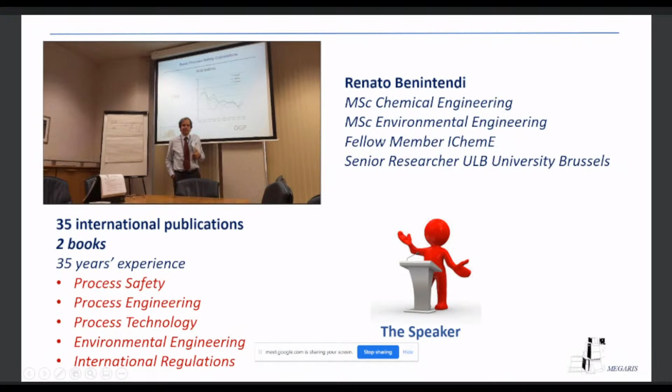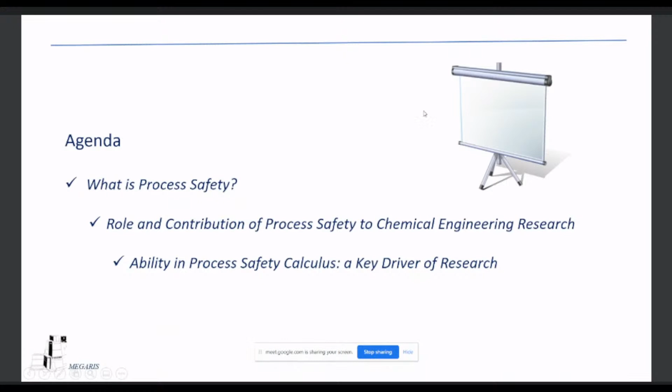I've tried to summarize this into 3 main questions, essentially covering the subject we are going to face today. The first is, what is process safety? That's important to share with you, to have a common understanding of the wording, especially for those of you not yet involved in process safety jobs. So what is process safety? The second subject is the role and contribution of process safety to chemical engineering research. And we will finish our discussion by presenting something about the ability in process safety calculus as a key driver of research.

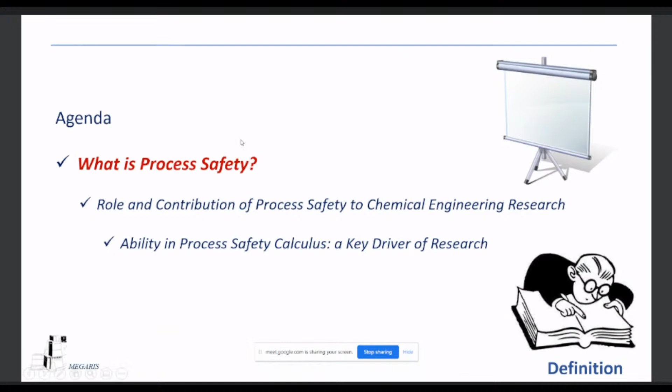This word is very easy, very popular and familiar for people that work in engineering companies. But if we go into the word, we can discover something that could be very interesting, and especially very effective in clarifying exactly what we mean, much more than just the general meaning, the implications that such a word entails.

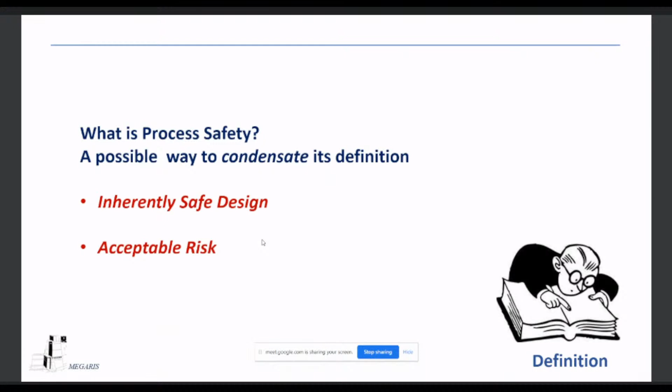I've tried to condense the definition of process safety into 2 main lines: inherently safe design and acceptable risk. I have the illusion that these probably cover 100% of the challenge and difficulty that we normally meet when trying to be effective in resolving the problems of process safety.

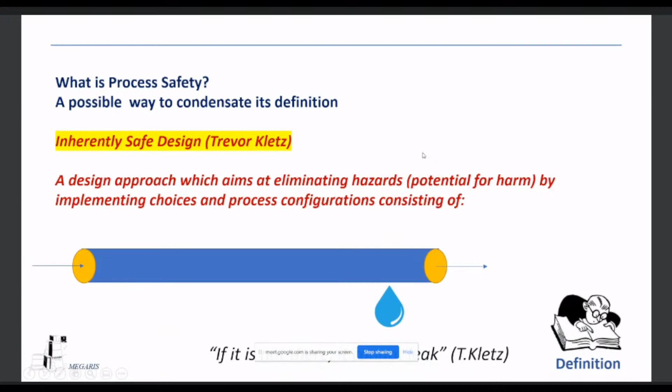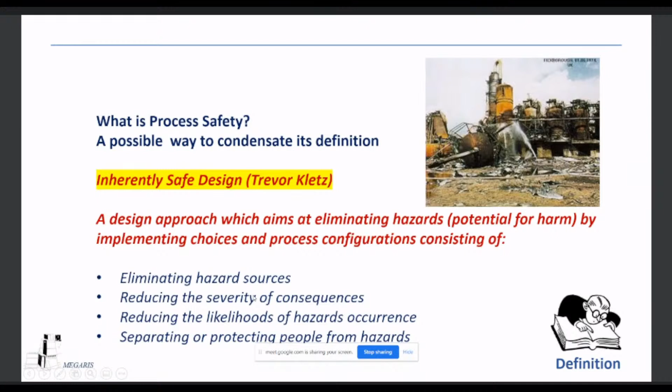Inherently safe design: we have to go back into the past and remind you of Trevor Kletz. Trevor Kletz was a chemical engineer working for ICI in the United Kingdom decades ago. After a couple of important incidents in the UK, first of all the Flixborough incident, he created essentially the concept of inherently safe design, which we can define as a design approach aimed at eliminating hazards. Remember, hazard is a potential for harm. This is achieved by implementing choices and process configurations consisting of eliminating hazard sources, reducing the severity of consequences, reducing the likelihood of hazard occurrence, and separating or protecting people from hazards. So this is essentially the target.

We have to go back to focus better on the introduction of this definition into process safety. 1974, it was a Saturday, and of course we know that the most catastrophic incident in process safety history occurred during the weekend - this is not just a secondary thought. We had essentially a series of reactors managed by the Nypro plant company. We are in the UK, in England. This process was related to the production of caprolactam through oxidation of cyclohexane into cyclohexanone. There was a problem.

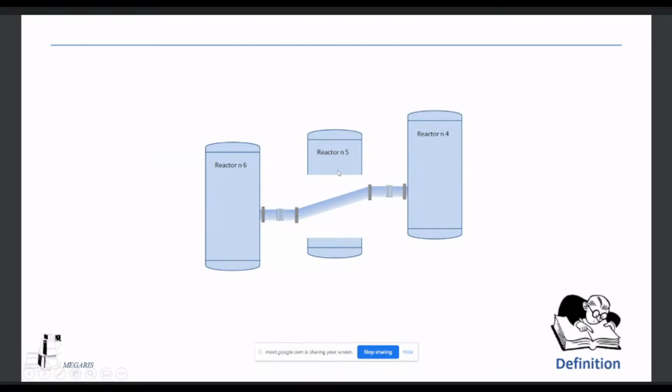A junior process safety engineer was on site on Saturday. There were no managers, no senior technicians on site. Just a junior engineer discovered that reactor number 5 was affected by stress corrosion, and decided to remove reactor number 5. We can see essentially some boilers - these are reactors, but in reality they are like boilers, and there was flow from the top to the bottom by gravity. He found out the reactor number 5 was affected by corrosion, but just the beginning of corrosion, and decided to remove it.

The best he could do was connect reactor number 6 to reactor number 4 with a dogleg, with a gap between the axis of the bellows of the flanges. It was an absolutely big mistake. We can probably figure out what happened: in reality, when the plant was started again - we're dealing with something like 200 degrees Celsius and significant pressure in terms of bar - so a very potentially critical process condition.

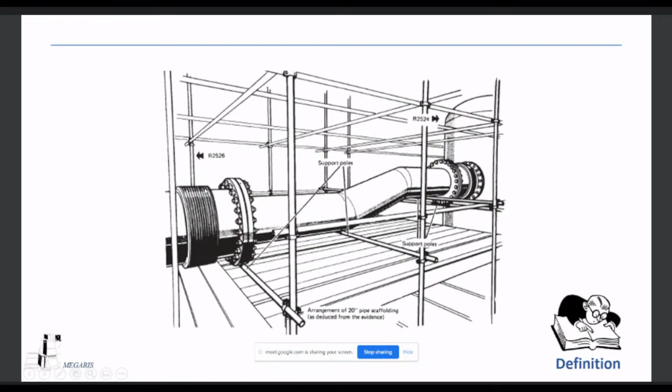When the plant was restarted, there was essentially a moment applied through the axis of the flanges that was initially balanced by an additional moment consisting of two shear forces. These shear forces ruptured the bellows, which were not designed to withstand such forces. And the problem was that we had essentially released - there was a leak of cyclohexane at very high temperature.

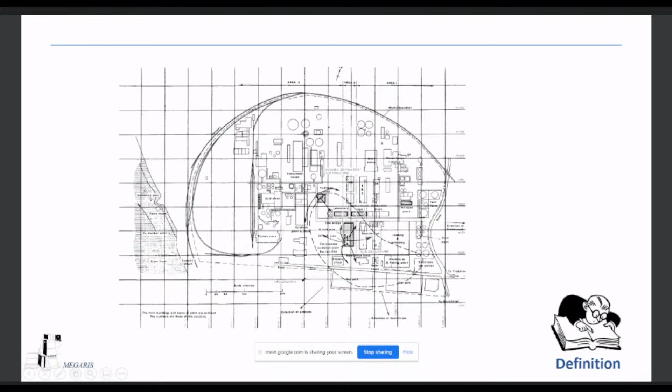There was a witness reporting that the cloud started from the location of the reactors, the 6 reactors, and arrived at the so-called hydrogen location of the nitro plant - that was the previous process configuration, where probably the cloud was ignited. There was a flash fire. Some witnesses reported that the laminar burning velocity governed the flashback of the flame back through the plant site, and this was essentially the result.

We were in 1974. Before that, probably the only incidents we can register in our records were related to inorganic chemistry.

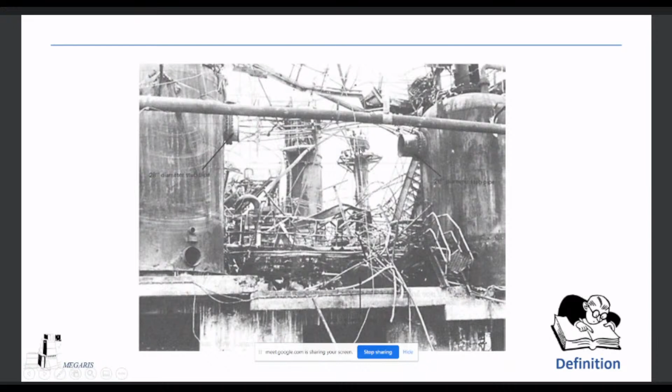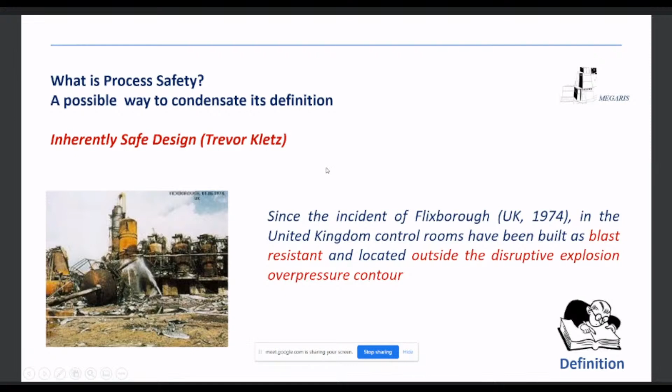So after 2 years, as you probably know, in Europe, in Italy, we had the Seveso incident, and after that we had some regulation that were introduced in the international regulation. Since the incident of Flixborough in the United Kingdom, control rooms have been built as blast resistant and located outside the disruptive explosion overpressure contour. In the UK, we probably anticipated the introduction of severe and serious rules like this much earlier than in the rest of Europe.

So what practically speaking do we mean with inherently safe design? Until 15-20 years ago, in order to reduce oxygen concentration in the boiler water, we have a blowdown. So we feed the boiler water with new, essentially demi water, and oxygen is essentially just a corrosion promoter, so we have to keep down the oxygen concentration.

Until 20 years ago, more or less, I remember, because I worked as a process engineer in this field, hydrazine was added to water. I remember personally that hydrazine was used for a long time in boiler water as an oxygen scavenger. It has been completely banned because, as you know, under the CLP regulation in Europe, used for classification, labeling, and packaging, this is toxic if swallowed, toxic in contact with skin, and so on. So this is essentially an example of one of the first pillars of inherently safe design: replacement, substitution.

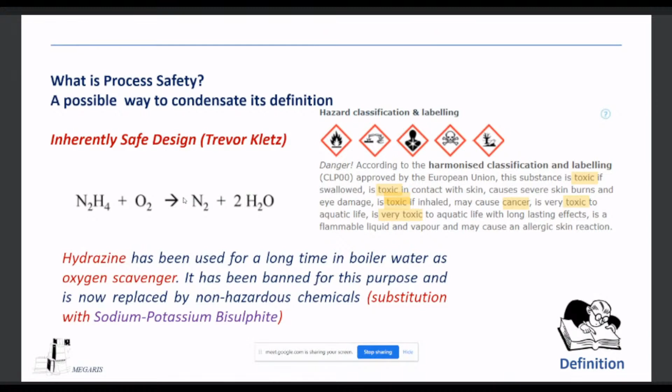Today, in order to achieve the same target, we add sodium or potassium bisulfite. So it is inherently safe because there is no longer a toxic chemical in the water. This is a way to comply with inherently safe design rules.

The second keyword to identify process safety is acceptable risk. Acceptable risk is not an easy or immediate concept, because unfortunately we have to pay something for risk. We cannot reduce it to zero. There is essentially no zero risk in our project, in our design, so we have to accept some risk. We can see here the UK ALARP diagram, which is internationally adopted and accepted, probably the most effective way to identify a validated acceptable risk criterion. So acceptable risk is the second keyword.

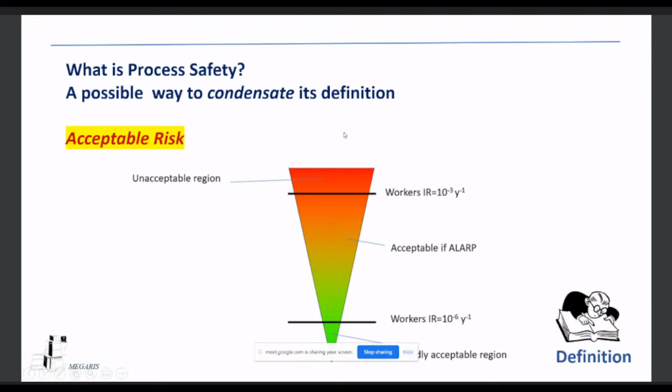So just to conclude this first building block of the definition, we can say that process safety can maybe be identified as a discipline of chemical engineering, or of course also other disciplines, but I'm a chemical engineer so I have to promote chemical engineering, aiming at predicting any possible hazardous process engineering deviated scenarios, potentially resulting in serious consequences for people, environment, and asset, encompassing viable techniques effective in minimizing the related effects and likelihood. I think this definition could work, maybe.

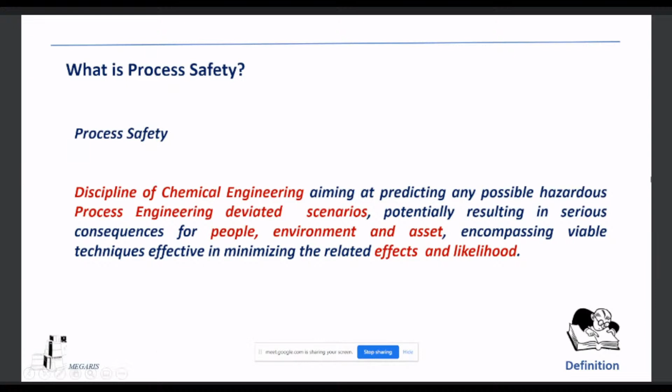Why is process safety different from other disciplines, and what is the relationship between process safety and process engineering? In my experience, I think process safety is somehow just a daughter of process engineering, or a sister. We know that outcomes of process engineering strictly comply with the design specification implemented through simulators like HYSYS, for example, according to license requirements. Any process deviations are predicted and properly managed by the control system to an acceptable extent. When we carry out a HAZOP study, we can discover some deviations, but in reality, if we have just a distillation column, it's not likely to have a huge departure from the design specification.

This is process engineering. Process safety, in my experience, I can recognize outcomes where process safety scenarios present a much larger qualitative and quantitative uncertainty. The adoption of software simulators, predictive models, and any kind of additional tool is not as effective as for process engineering. The bunch of competencies required for process safety from process safety engineers is highly multidisciplinary, and international regulation is essentially a way to require specific new techniques to be applied.

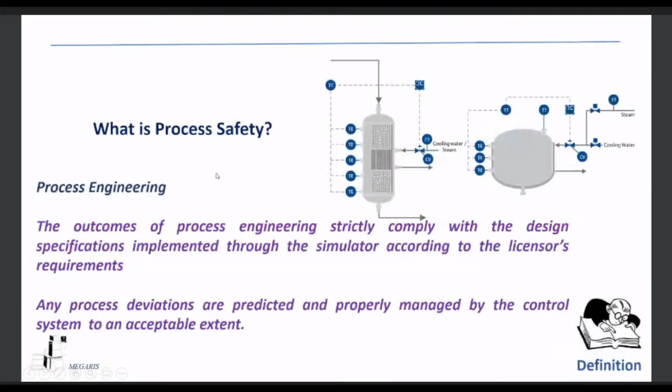So we can see that process safety is somehow different from process engineering. The spread of competencies, the spread of knowledge is probably larger. It's difficult to say this is a scenario, this is possibly the scenario, we could say.

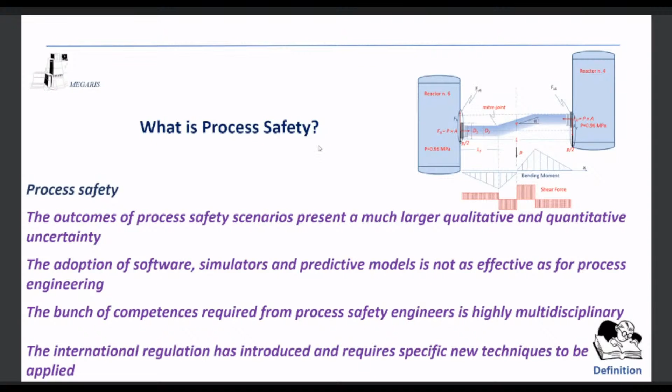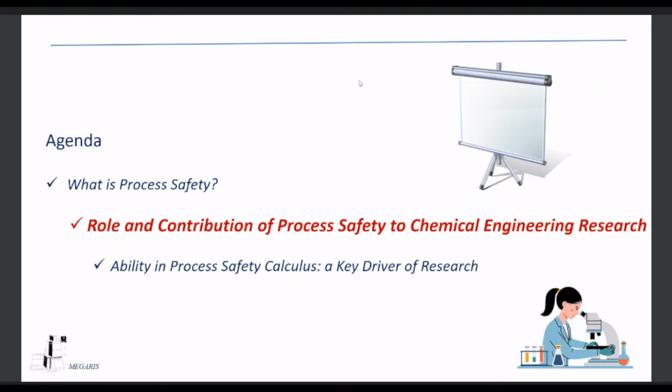So the second question, the second subject is: what is the role and contribution of process safety to chemical engineering research? That is essentially a subject that Savio has just put on the carpet. In order to cope with this specific subject, we have to consider what is the organization chart of a project.

We can see just a summary of the specific areas. We can recognize we have a project director, a project manager, an engineering manager, and some disciplines. What is the peculiarity? Why is the process safety engineer role so particular? As you can see, I've tried to identify some specific relationships between these roles, also using different colors.

In my experience and from the legal point of view, we can say that all the disciplines report to the engineering manager. It's unlikely, even if not completely impossible, that a mechanical engineer, civil engineer, or process engineer would talk directly to the project manager or to the project director.

But the role of process safety is very particular because we are dealing with people, asset, and environment. So process safety has the capacity, the ability, and also the power, in addition to discussing directly with other disciplines in a meeting or task relationship, to also speak directly with the project manager on some specific aspects of process safety engineering, and also with the project director.

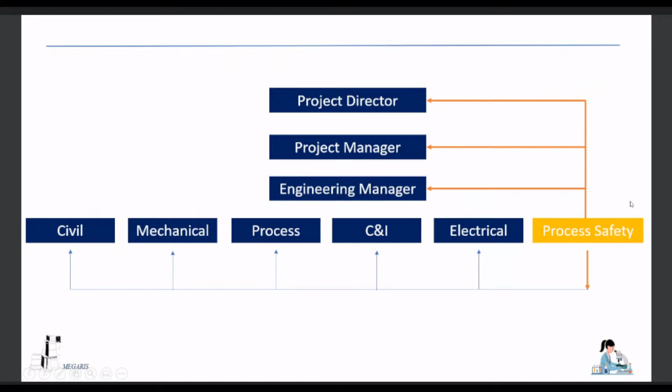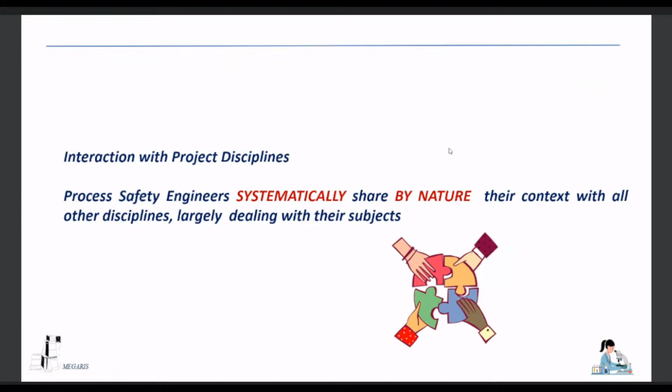This happens. We can say that process safety engineers systematically share, by nature, their context with all the other disciplines, largely dealing with their subject. We can have some examples.

I have been working in my latest EPC contract in the Middle East for 7 years with civil engineering, working on blast buildings. So competencies must be really large. Blast design of buildings and equipment implies significant implications, which require and entail a large overlapping of competencies and knowledge.

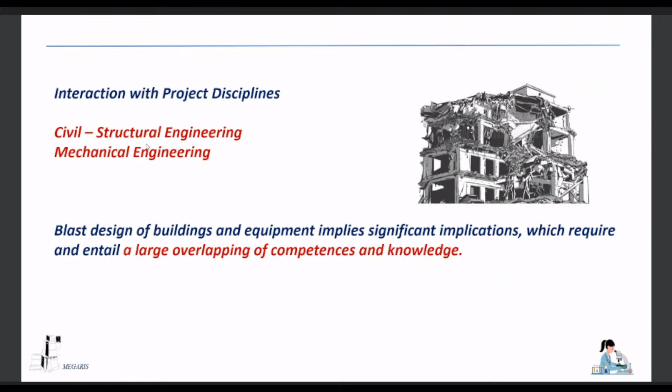We can see here, this is the result of an explosion. We must be able to understand and to have the same wording as civil engineering, because civil engineering competence is large, but is related to their specific discipline. So you have to be familiar with some additional concepts.

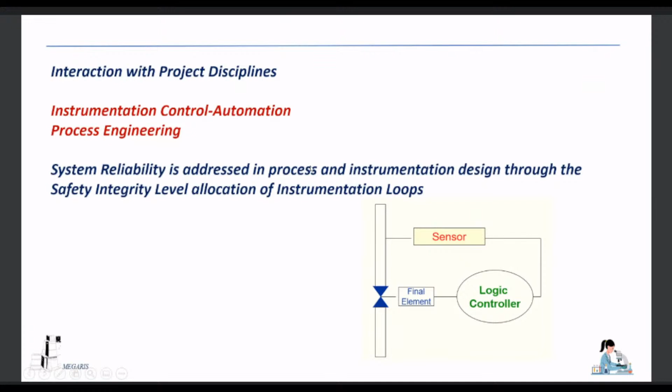We must be familiar also with instrumentation. You know that functional safety is now one of the most important subjects that we face in a project, so we must understand what system reliability means. This is addressed in the process instrumentation design through the safety integrity level allocation of instrumentation loops.

But we also have to discuss, in terms of legal and regulatory implications, with the electrical engineer, and in Europe also non-electrical equipment, so the mechanical engineer. The classification, electrical versus non-electrical, is a process safety engineering duty.

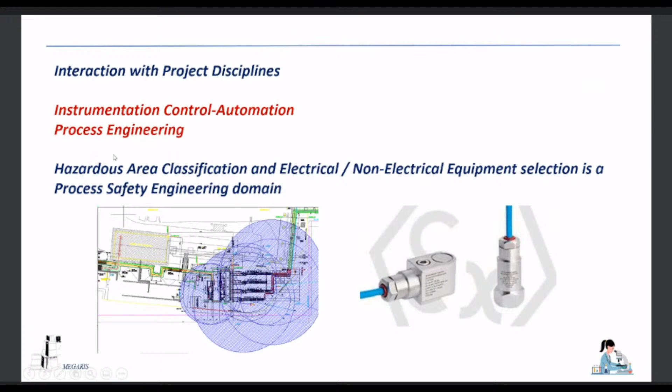So we also discuss with the process engineer, and with instrumentation and control automation people. So in reality, process safety scenarios in complex projects are various and are strongly multidisciplinary.

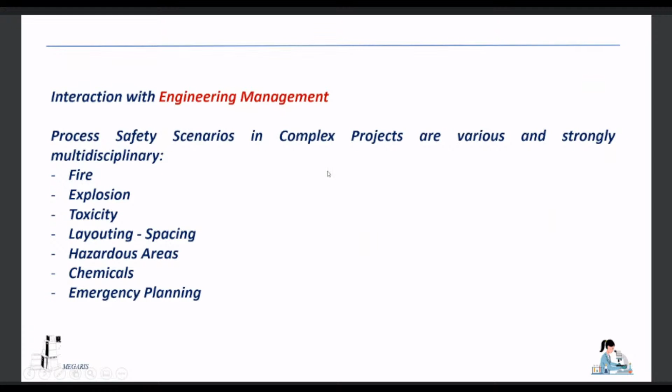So we essentially deal with fire, with explosion, with toxicity, with blast - so structural engineering, layouting and spacing, hazardous areas, chemicals, and emergency planning. This can probably identify the range of concepts and knowledge that we have to manage in order to be effective in a project like this.

The ALARP, or let's say the acceptable risk implication that we discussed before, implies some cost-related aspects. This is not trivial, because in reality, unfortunately, when we have to decide if and when risk is acceptable, we have to consider that it is essentially an economical exercise.

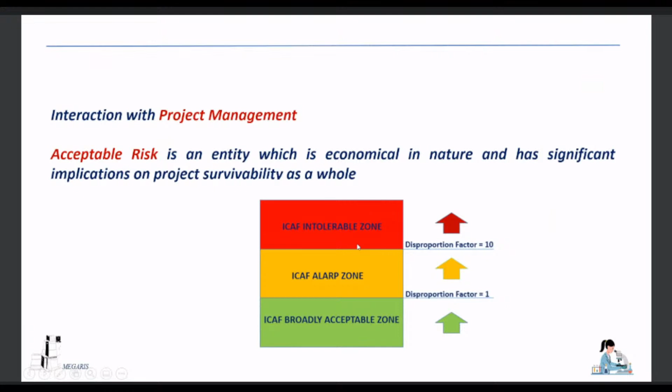So economical implications. In terms of project direction, it's in theory possible, though unlikely and difficult, that process safety lead is possibly the only discipline leader entitled to stop the continuation of a project or of production based on serious safety concerns.

In my experience, in order to make everything robust and substantiated, I can tell you I was asked by a project director to fly from London to Kuwait, Friday night to Saturday, because the project had been stopped anyway and there was a need to identify exactly the solution for some problems and issues. The final green light provider was myself. This shows how important the relationship of the process safety engineer's task is with the other parts of the project.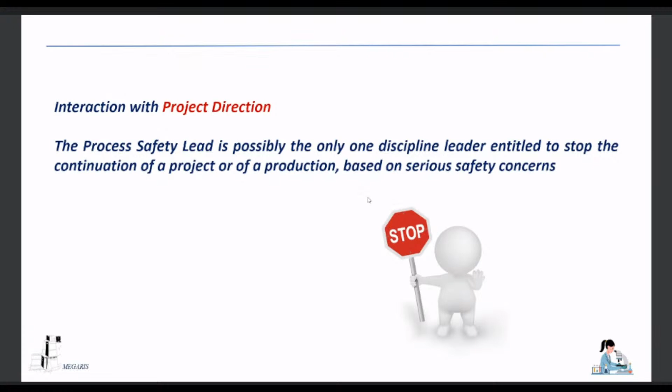The tremendous growth of safety and environmental aspects, related to the advancement of technology and the restrictions and requirements of regulations, have progressively resulted in the consolidation of process safety as a standalone discipline, contributing new concepts, principles, and techniques. The implications for chemical engineering research are huge.

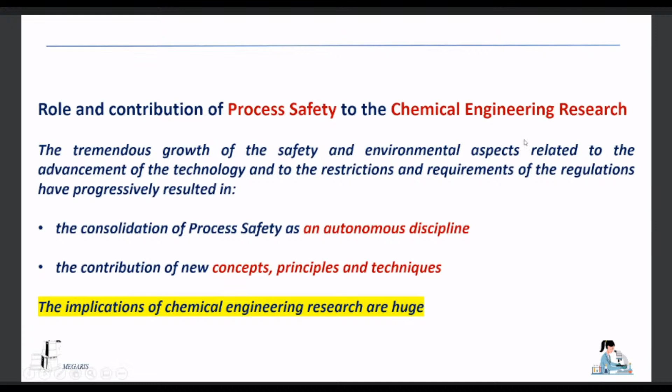For example, just to have a practical landing on the topic we're discussing: carbon capture and storage. The Kyoto Protocol identified greenhouse gases that must be reduced, and different countries are now working to reduce, by specific dates, the concentration and release of some greenhouse gases.

Of course the main enemy is carbon dioxide. You know what's happening everywhere in the world with the war. We can discuss the real effectiveness of this, but in reality these are essentially the gases in question, and carbon dioxide is by far the most important greenhouse gas to be reduced.

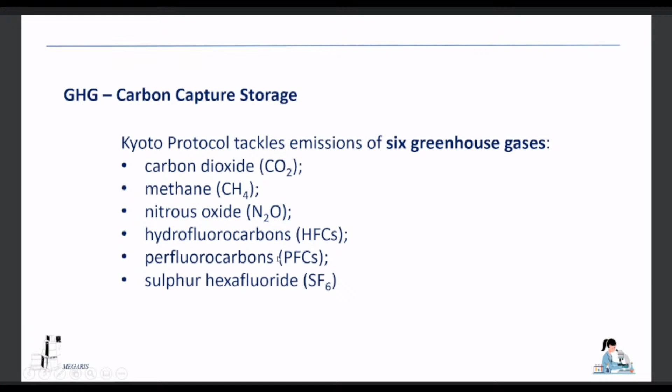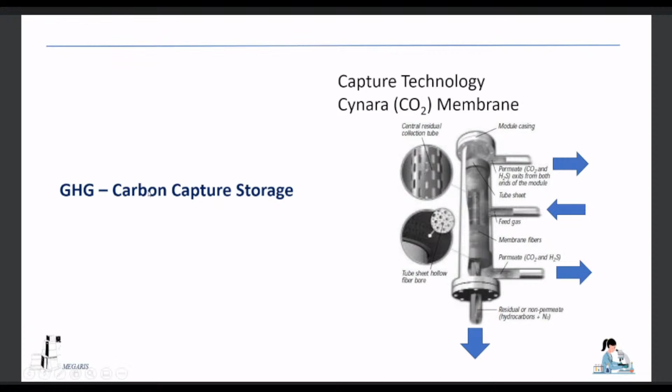I had some three to four experiences with carbon capture and storage. We can see here, for example, equipment essentially based on molecular sieve and membrane capable of removing carbon dioxide from methane for carbon capture storage. We can see the overall arrangement of the plant based on membrane separation of CO2.

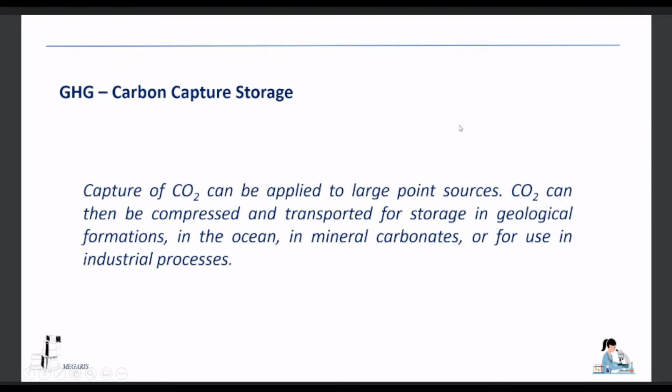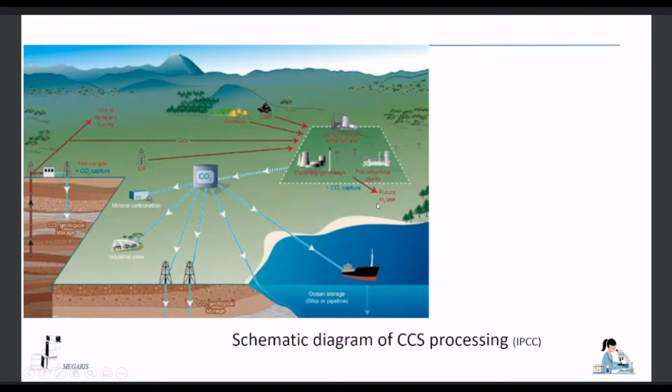What is essentially the final outcome of carbon capture storage? Generally, capture of CO2 can be applied to large point sources, and CO2 can be compressed and transported for storage in geological formations, in the ocean, or in mineral carbonates. So it's easy to plan and foresee the way to remove and dispose of CO2. We can see here a kind of multi-directional disposal of CO2.

But in reality, some problems have come out when dealing with carbon dioxide. The reason is that prior to implementing carbon capture and storage regulation, the worldwide managed technology was related only to some specific thresholds of concentration and limitations in inventory. The new problem was that starting from carbon capture and storage new projects, we were forced to manage new horizons, new tasks. So long pipelines have been designed entailing unknown risk scenarios for people, vulnerability, and environment.

We'll try to understand why these are unknown risk scenarios. The process characteristics of the streams, notably supercritical conditions, present new process scenarios - gas streams somehow behaving as a liquid, with new challenges for compressors and related equipment. Carbon dioxide phase transition is very particular: below its triple point, the vapor phase is in equilibrium with solid, causing potential critical process consequences for equipment and piping.

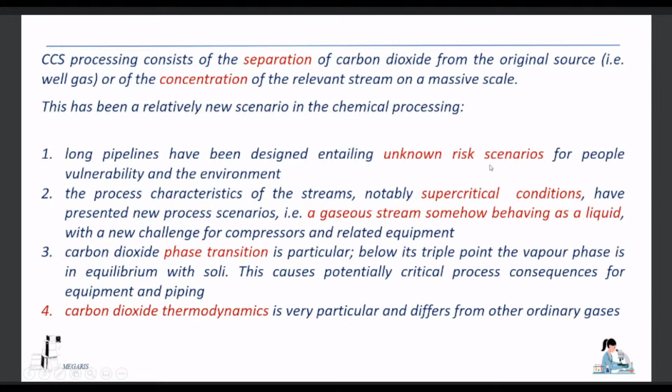Last but not least, and this is very particular and probably identifies very interesting research challenges: carbon dioxide equilibrium thermodynamics doesn't work very well, or doesn't work completely. So it's very particular and differs from other ordinary gases.

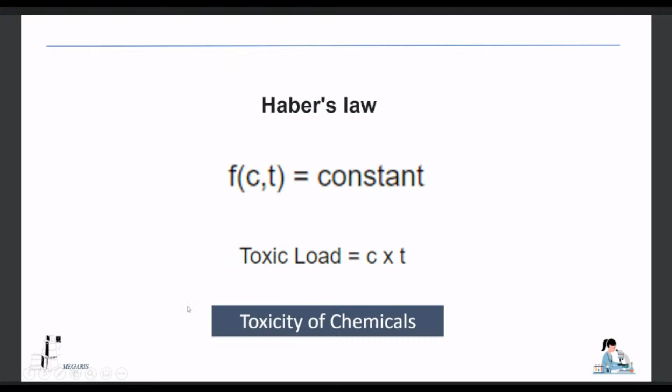We discussed toxicity and unknown variables - what do we mean exactly? We know that Haber's law identifies a toxic load. Toxic load for a chemical is a measure, a product, that takes into account two main parameters: one is the concentration, and the second is the exposure time. This couple of variables can probably cover all the important parameters we have to manage when dealing with toxicity.

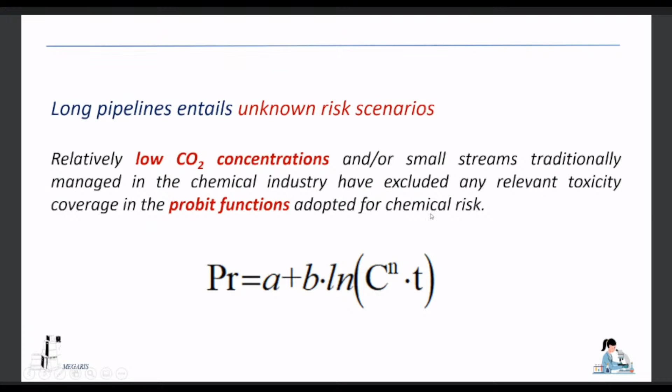Relatively low CO2 concentration or small streams traditionally managed in the chemical industry have excluded any relevant toxicity coverage in the probit function adopted for chemical risk. This is very weird, because in reality, when we try to understand what happened, for example, for hydrogen sulfide, we can see that using the probit function, moving from one exposure time to another, depending on concentration, we can have a percentage of fatalities.

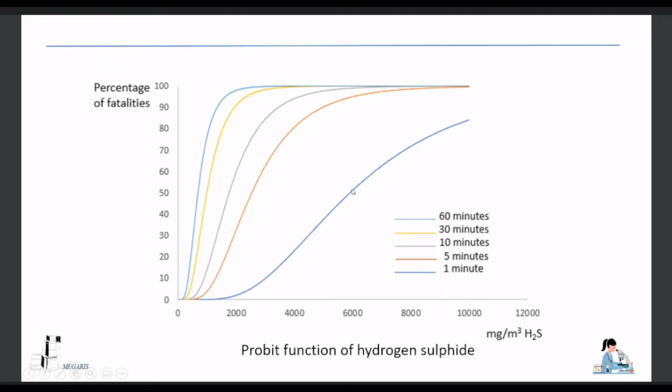In reality, TNO, one of the let's say holy monsters in process safety, a very highly reputable institution, provided many years ago, much earlier than 2005, maybe in the 80s, the list of A, B, and N, the constants of the probit function, in order to enable the process safety engineer to arrange the probit function and identify exactly the percentage.

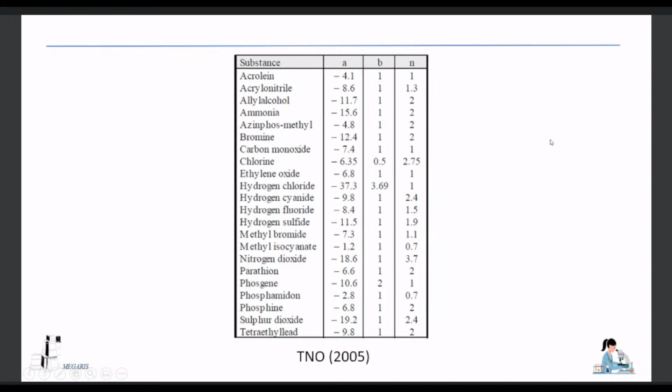As you can see here, we don't have carbon dioxide. This is strange, weird, because in reality carbon dioxide is a gas, so probably we can expect some specific threshold of toxicity.

In fact, the UK Health and Safety Executive has been working to complete the list, and they have introduced SLOT and SLOD. So the Health and Safety Executive has run a very strong research program. After that, essentially carbon capture storage was introduced, and in the UK there was a national grid program.

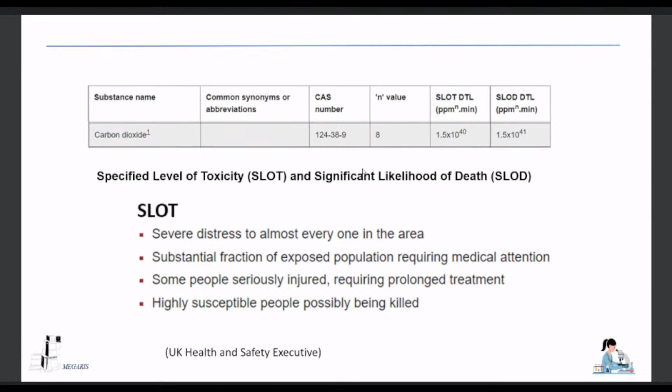So carbon dioxide, as you can see now, according to the UK Health and Safety Executive, can rely on a specific probit function. This is essentially the result of specific toxicity research. All the other institutions, including TNO, haven't been working on CO2, because the problem was: if we have a release, a leakage, how can we prepare our safety plan without any validated data? So this is an example of how important chemical engineering research is for process safety regarding toxicity, the new challenges, the new technology, the new regulation.

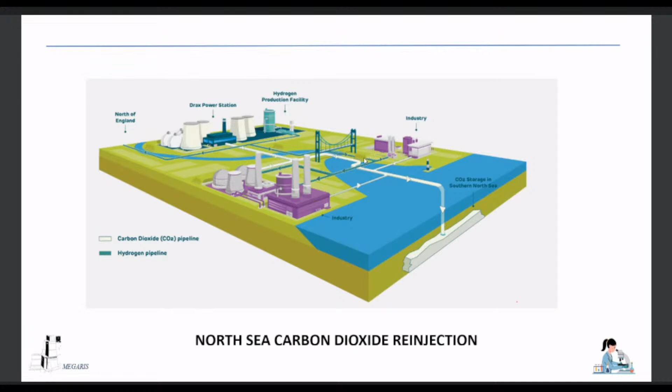If we can see here, we can see how the carbon dioxide reinjection has been planned in the UK. I attended some specific projects, and I've been working on carbon capture storage related to the national grid in the UK. It's important to focus on this diagram.

In reality, I also worked in Malaysia on carbon capture storage, and I remember that Petronas are planning to implement carbon capture storage for their plant, and they will be managing supercritical flow. So this is essentially the condition: we should be around maybe 80 bar, and we have supercritical flow.

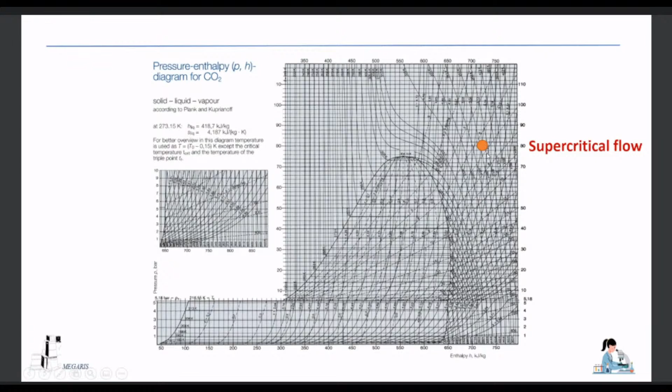So if you now just think about a pipeline, you can see essentially a supercritical carbon dioxide flowing. Supercritical flow means that it's a gas but behaves as a liquid due to its very high density. Special pumps are required, and there was no prior experience, so the research and development department of Petronas has been working a lot in order to identify exactly the process conditions of supercritical carbon dioxide. So carbon dioxide pumping has posed a new operational issue.

And once again, chemical engineering research has been working, and is still working, on what is the best operating way to flow, to manage, and to pump liquid or supercritical CO2. This is very specific - there was no prior experience about it.

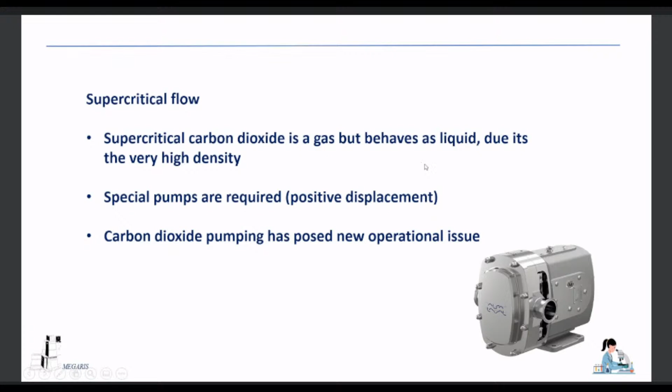We can see here essentially we have a compressor, and essentially just the ordinary process line. This 30 meters per second is the velocity of the CO2 that is going to be essentially flushed downstream. But we also have here essentially a pressure relief valve that is able to vent CO2. Of course, we are in sonic condition - we have sonic condition. So expectedly, our velocity, if we have the pressure relief valve operation, is about 300 meters per second.

I remember I had a specific discussion with the process guys, and they applied HYSYS. HYSYS said, okay, you have an isenthalpic process, because you can have just the Joule-Kelvin, Joule-Thomson effect.

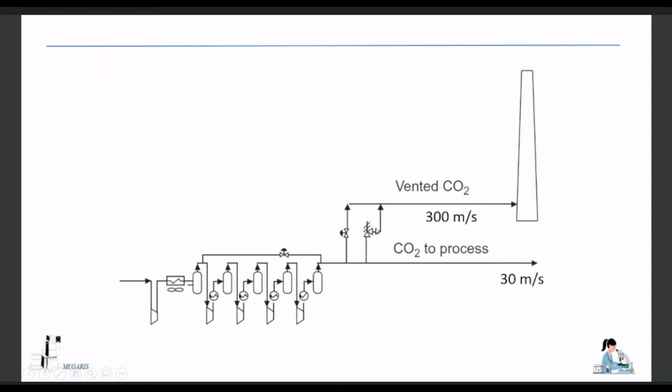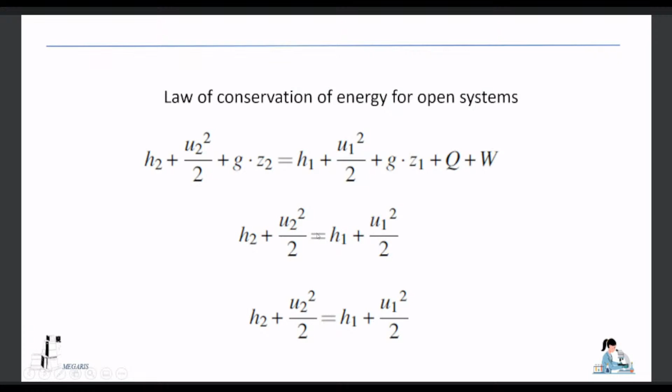It is isenthalpic if you have essentially a release through the pressure relief valve, because by memory, the previous assumption of the simulator was that it is isenthalpic, so the downstream enthalpy is the same as the upstream enthalpy. The process simulator foresees an isenthalpic expansion according to JT throttling transformation. But we know that the Joule-Thomson equation is obtained from the law of conservation of energy for an open system. We can conclude that we can have an isenthalpic transformation, but provided that the velocities are the same. Otherwise, in reality, we have a different value of the enthalpy downstream.

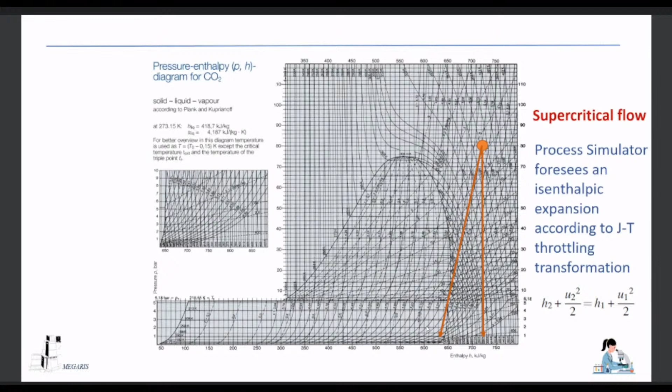In reality, if we consider that we are starting from 30 meters per second and we arrive at 300 meters per second, probably we don't have an isenthalpic process. We can have essentially just a slope for the transformation line, and we have the risk of entering the solid formation zone. This was a problem that was not in the memory of people and required a specific research approach just to adjust the calculation.

In reality, expansion in a carbon dioxide stream can result in solid formation, plugging, and embrittlement. Accidental releases to atmosphere pose serious uncertainty in the prediction of dispersion outcomes, both due to solid formation and the specific thermodynamics of carbon dioxide. Carbon dioxide does not follow strictly equilibrium thermodynamics due to longer relaxation time compared to ordinary gas. The last sentence is very important.

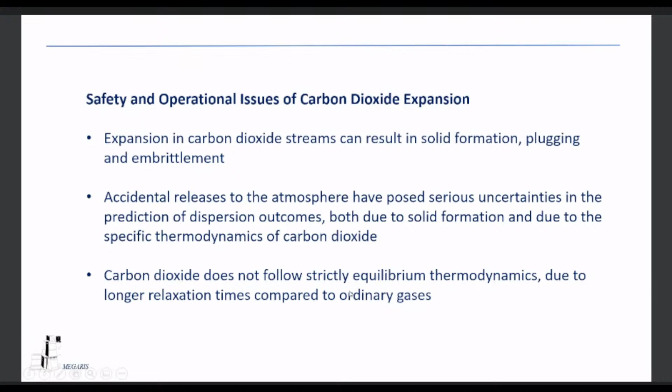We can jump to this, which is very important and probably the heart of our discussion that we are going to finish. We can see here that the blue line is the line that probably we can expect to follow if we apply equilibrium thermodynamics. What the researchers discovered regarding this project, the CO2 pipeline in China, there was a long pipeline, industrial scale, that was operated in order to understand, and there was a simulation of release.

There was measurement regarding essentially the behavior of CO2, and they discovered that in reality there was a significant departure of CO2 in terms of vapor and vapor-solid, because here we are below the triple point. There was a kind of oversaturation.

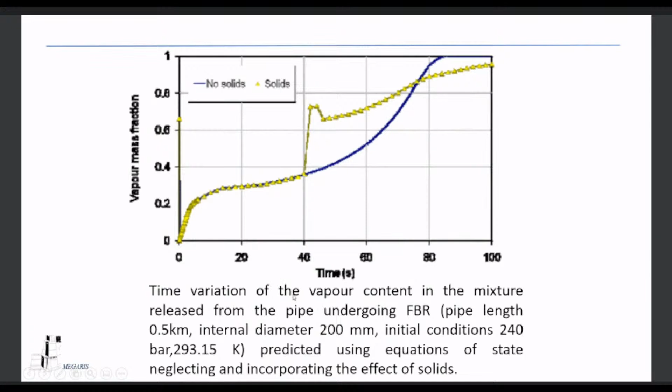So they experienced essentially an oversaturation, accumulation of a higher concentration of vapor mass that was not expected when adopting the equation of state of carbon dioxide, prior to moving to the solid. This was essentially obtained thanks to the research program. It was a long multidisciplinary program that was essentially aimed to understand exactly what is the behavior, because there was no memory.

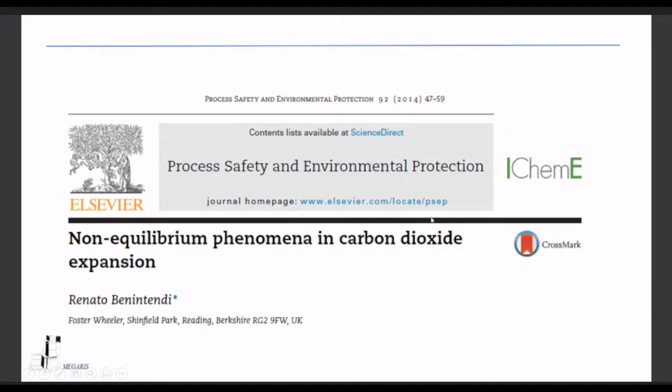I just played about this point, and in reality it was very nice to me to try to have a kind of theoretical model to explain why carbon dioxide is so different, and why when you are going to have a plant and you are feeding carbon dioxide, you can expect to have some strange and unexpected behavior that can impact, and can be really serious in terms of equipment health, but also in terms of process safety.

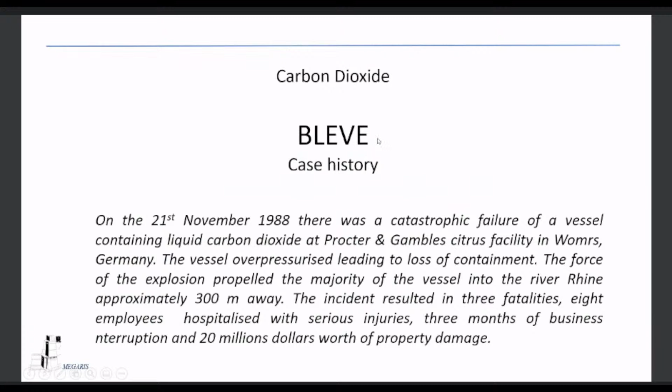Okay, I'm going fast. Carbon dioxide can undergo BLEVE because, of course, it's a liquid, and if we have a catastrophic failure or collapse of a tank, a ruptured tank, we can have essentially just an expansion. And going on, we can close this discussion, having presented fluid curtain technology.

Fluid curtain technology is essentially just a process safety mitigation system that you can adopt when you are in presence of some specific hazardous chemicals such as H2S, ammonia, CO, HCN, HF, and others, and your risk scenario doesn't comply with risk limits. So prevention doesn't work. You must mitigate.

I've personally been working a lot on this for 3 years in my last project. The peculiarity of this specific system is that it's a plug cross flow reactor that works according to the Fthenakis model. Professor Fthenakis is a professor at Columbia University, and I've been discussing with him after my publication. It's unlikely that you can have this specific process reactor configuration in process engineering.

So it means that a specific dedicated research program for a reactor configuration like this can be effective, because normally this is an open space reactor. You essentially have release or leak of H2S and ammonia, and you can have a specific configuration to follow here. It's not very easy to design because it must work according to a very specific parametrical range, and you can have a reduction, removing or preventing the release from impacting people and environment by more than 99%. This reactor configuration belongs to process safety engineering and still requires a lot of research effort to extend.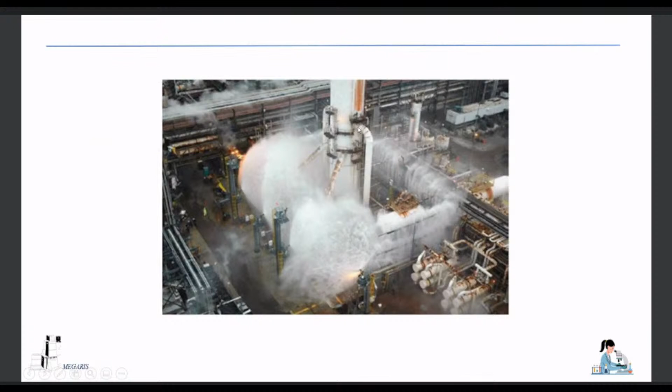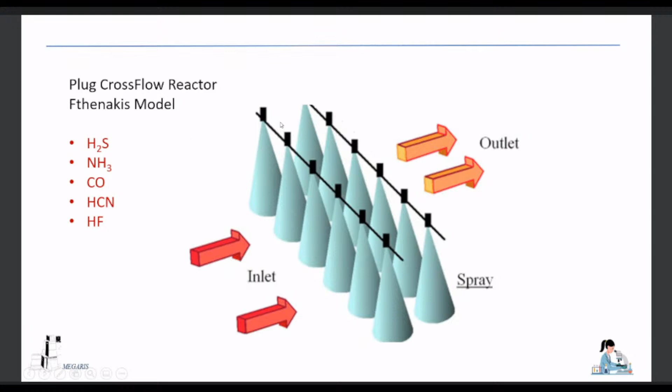There was no precedent for H2S, and there was a big project in the Middle East, and I've been working a lot in order to adjust, because it was different, especially because the absorption coefficient for H2S is not good. So we had to work a lot, and we carried out a research program in order to adjust and adapt this specific cross-flow reactor configuration to H2S.

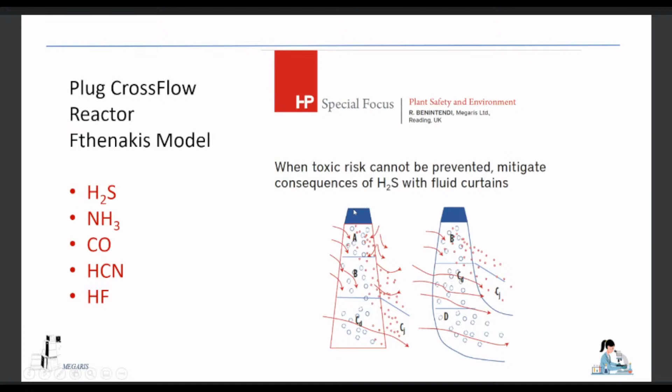This is an additional example - here you can see the thermofluid dynamics. The fluid dynamic part is very important. If you fall outside the range, the system doesn't work. So this is very, very difficult and requires a lot of study.

Okay, now we conclude with 3-4 slides on ability in process safety calculation, a key driver of research. We can conclude: process safety scenarios imply unusual complex process configurations which cannot always be managed according to the techniques of process engineering. This entails, in turn, the possession of specific calculus capabilities not necessarily supported by software and calculation tools. So the process safety engineer must be very, very clever in calculation.

Process safety conditions may be extreme in terms of thermofluid dynamic features and present a high degree of novelty and unpredictability with respect to the development of techniques of ordinary engineering. Specific areas of engineering require a strong impulse of applied research to cope with the requirements and objectives of highly demanding regulation, risk limits, and the multidisciplinary context of involved subjects.

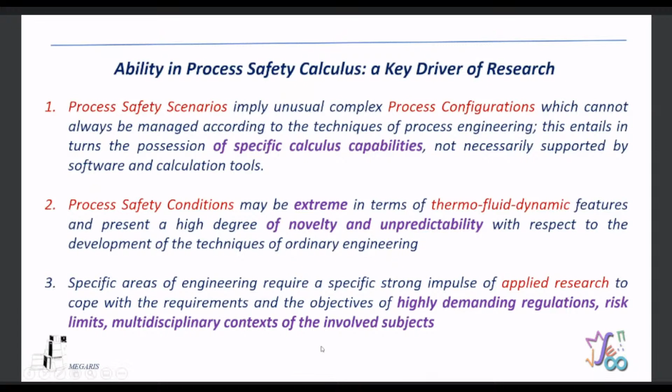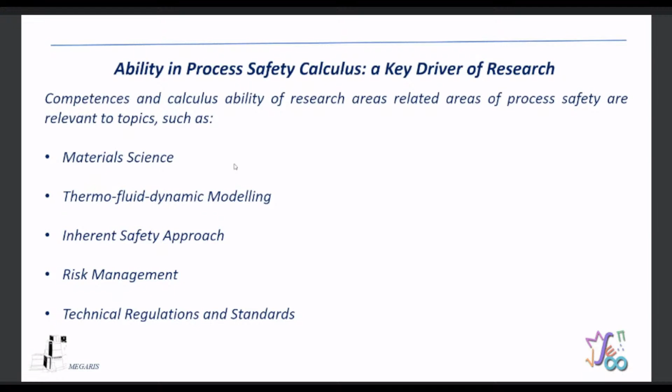So what is the panel of competencies? I think: material science, thermofluid dynamic modeling, inherent safety approach, risk management, technical regulation and standards.

Here we can see a kind of conclusive summary. What is the relationship between an ordinary route of the process safety engineer's task and research? This is also consistent with my experience. We normally have a context with some process safety requirements. Typically, it doesn't happen always, but we can have unresolved issues and new scenarios. So we have a research horizon - we are forced to essentially face new approaches.

What is the final outcome of a new approach? It can be new technologies and new safety techniques. So we can essentially split the final outcome of research in process safety: we have the final gain that we can earn, and we have a final gift that consists of new technologies - meaning new technology other than process safety. We can have a lot of new materials, new technicalities, new process configurations coming from the process safety scenario, and we can also have new safety techniques themselves - working for process safety in order to make process safety more effective.

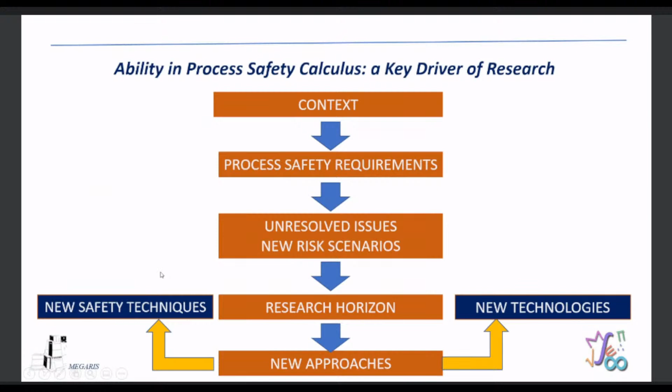For example, and I'll conclude with this: this was essentially the previous ATEX, IEC, and European norm. Until 10 years ago, you essentially used the low explosion limit, and you had absolutely huge clouds that were absolutely ineffective, because you were using a low explosion limit, whereas normally you don't have a low explosion limit at very low concentration - that means a big cloud.

So there was a kind of revised ATEX standard. I am really proud to have had a part in this revision, because in 2010 I essentially discovered that the turbulent jet modeling for hazardous area classification, due to air entrainment, reduced the concentration. So the adoption of a low explosion limit was an absolutely huge, serious drawback for the company, because you had huge hazardous areas.

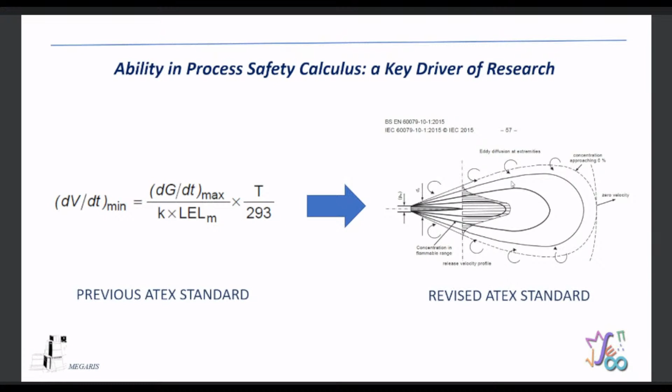In reality, the Health and Safety Executive in the UK carried out another research program using Fluent CFD, and they discovered that in reality, the real cloud, due to air entrainment, was much smaller than the original. So this is essentially a clear indication of how ability in process safety calculation and the execution of a research program was effective.

Now there is a new standard that is used with much smaller values. You can see here they recognize the effectiveness of my publication, and this has been incorporated in the new standard.

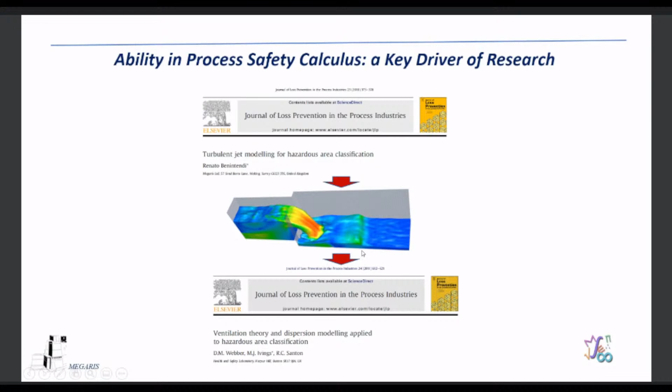The last one is interesting because during HAZOP there was a very important licensor that essentially explained that in reality HCl, used in the Penex process, isomerization process, could be flared, and there was no conclusion about what was the outcome of this. So I remember asking, okay, what about HCl, hydrogen chloride, to the flare?

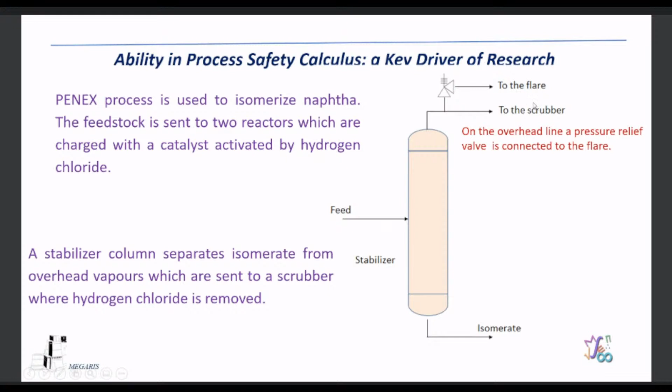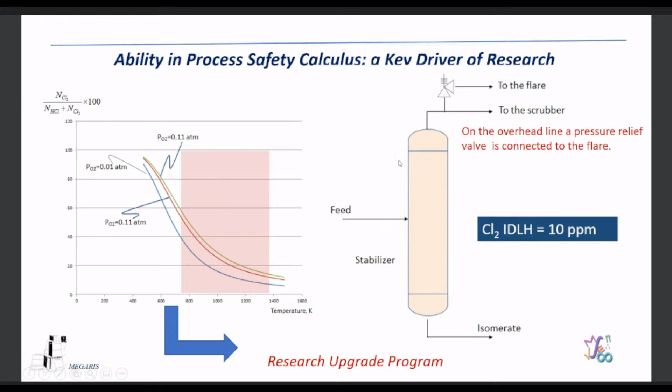You can have some problem. If you are lucky, you can keep hydrogen chloride, but you can also have Cl2. They were completely silent, and they recognized that this was a part of the technology that probably was not complete. After that, they were just trying to cope with the problem, and they essentially worked on the equilibrium of Deacon, that is essentially the equilibrium between Cl2 and HCl, in order to find the best working point of the process and reduce any kind of risk.

Okay, thank you very much. I hope I wasn't too long, and I am happy to discuss with you if you want.

Thank you, Renato. Thank you for the presentation, for accepting our invitation. It was a lovely and comprehensive presentation. We have a few questions here that we're going to go through now and discuss a little bit. As I told you before, there's a bunch of people here from undergrad, graduate students, and researchers.

So just assume the questions are going to be pretty mixed. But the first one goes like this: one of the undergrad students, probably taking a fluid dynamics course this semester, is asking, as far as fluid dynamics is concerned, how important are the basic fundamentals of fluid mechanics in the context of process safety?

Yeah, it's a very good question. Fluid dynamics in particular, yes? Okay, it's a very important question. Sorry for not addressing this earlier, but I was very careful about your time.

As you know, I hope you've been able to use my book to sleep very well overnight, but in reality, I dedicated the first 6 chapters of the book to fundamentals, because I found that even as chemical engineers, we have a kind of background preparation that should cover everything. But in reality there are two points: first, some specific subjects are not, for economical reasons, completely covered during studies; and last, some specific chapters are not specifically addressed to process safety.